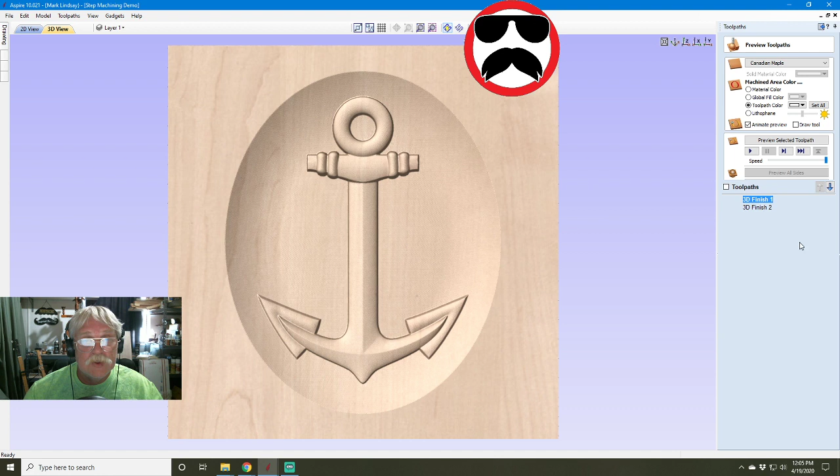Okay. Looking at the 3D view, I'm going to have to go ahead and close the preview, which I'm loath to do. But if we look in the 3D view, you'll see this representation of the material here. Let me go back over here to the modeling tab. You'll see this representation right here. It looks like the surface of the material. This is the modeling plane.

And the way it differs from the material surface is this is the plane that all of these models are built on. Whether you're in additive mode right here, your combined mode is additive. It's adding this entire model on top of this plane, and you're building up models from here. Remember that VCarve and Aspire both model starting from the bottom up. Well, they have to have something to sit on, and that's what this modeling plane is.

Now, one of the questions I got in the comments was, why didn't I put a zero plane here when a zero plane is needed to clean up the edges, especially on a dish? And the guy who asked the question was absolutely correct. I should have put a zero plane here, but I didn't want to add confusion by adding too many steps. So I just kept it basic, because what we're concerned with is the detail on this anchor. We weren't really concerned with what's going out here.

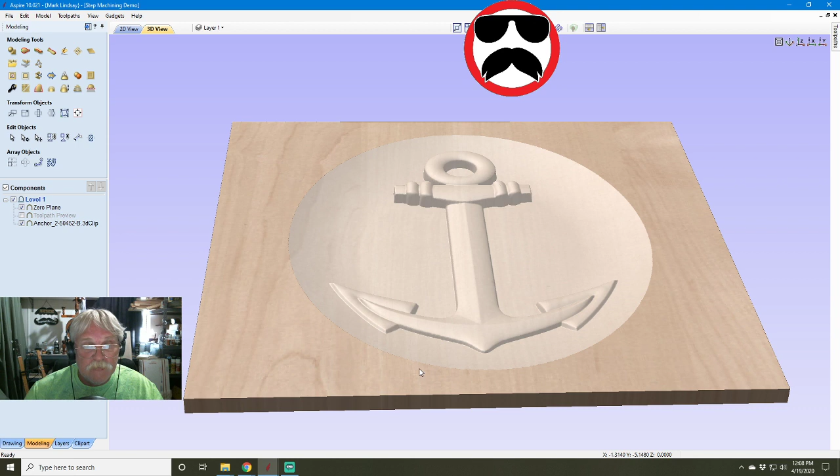Then when everything is built up, the zero plane adds the surface of the material and integrates it with the models that you have out here. I hope that answers your question. Let me know if that confuses you.

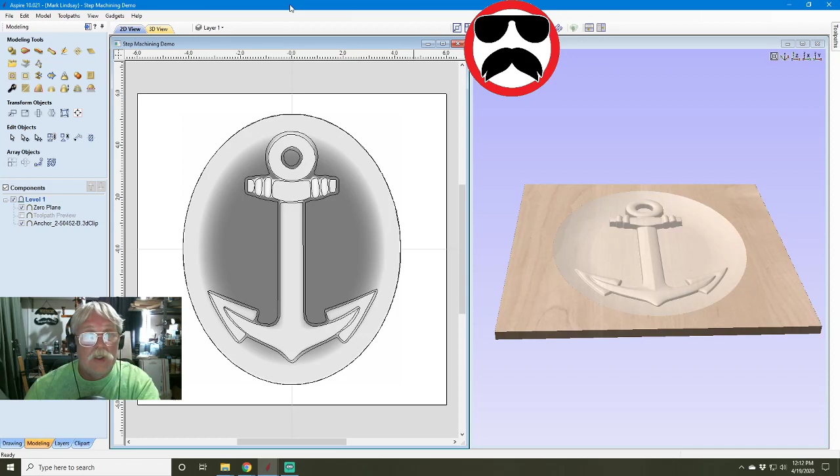Is there a way to carve the anchor and bowl a little shallower? Yes, there is, Dale. Let me go back into Aspire here. We'll go back into the 3D view, and back to a straight Z view. That has to do with the properties of the anchor. Now I've got the anchor selected here. We'll go up here into the properties, and we see the shape height. I referenced this briefly in the video, but we've got a shape height of 0.3525.

And if we turn this, we can see that means the lowest point it's cutting down in here is that thickness here. Now, if I bring it down, let's say to 1/4 of an inch, and let it update, if you look down at my readouts, you can see that the lowest point it's cutting is 1/4 of an inch deep. So that's all to do with the shape height here.

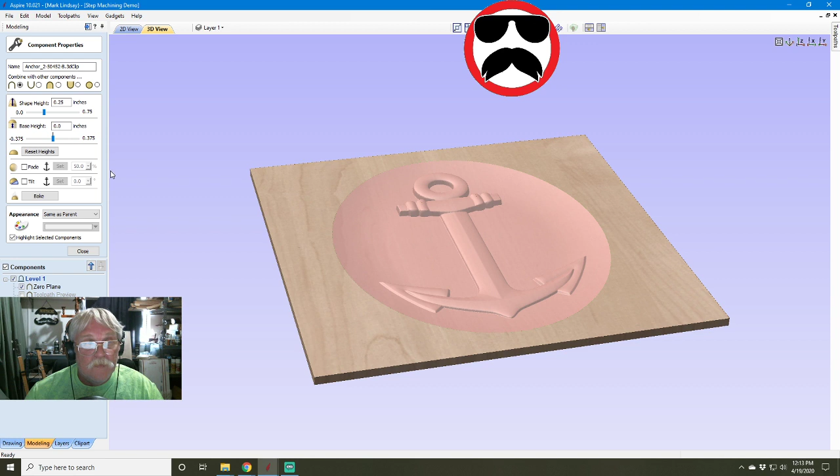And it also updated the zero plane, because it now believes, this being the surface of my material, the distance from my zero plane down to my modeling plane is only 1/4 of an inch, because that's as deep as it's going to cut. But that's controlled right here in the properties with the shape height. Now I'm going to Control Z to undo that, and we're back to my regular height, and we'll go back to a straight Z view. I hope that answered that question. So let's go back and look for more questions.

Michael Roy said, okay, wait a minute. Let me go back all the way and get them in order here. Kurt Briegel, thanks. So how does one decide how far down in the material the modeling plane is? Okay, there are a couple of ways of doing that. Let me go back to Aspire. And I should just actually look at this stuff before I switch back and forth.

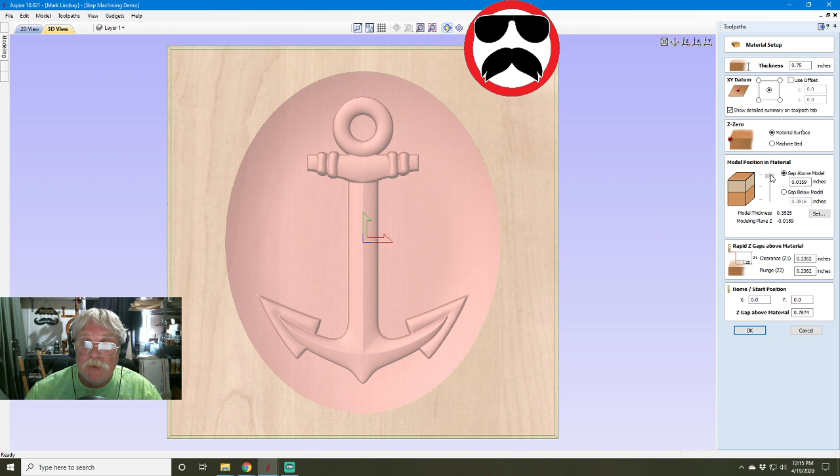If you're using clip art or you have drawn a model and you are not importing something, you can adjust where the modeling plane is by coming over here into Material. Let me cancel that. Come over here into Material Setup, click on Set, and adjusting the model position in the material. That's not exactly the same thing, but it's close to adjusting where this modeling plane is in relation to your block of material here.

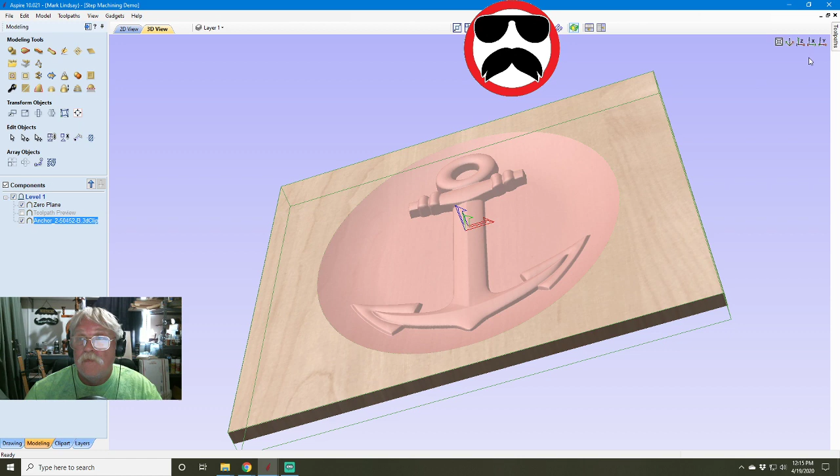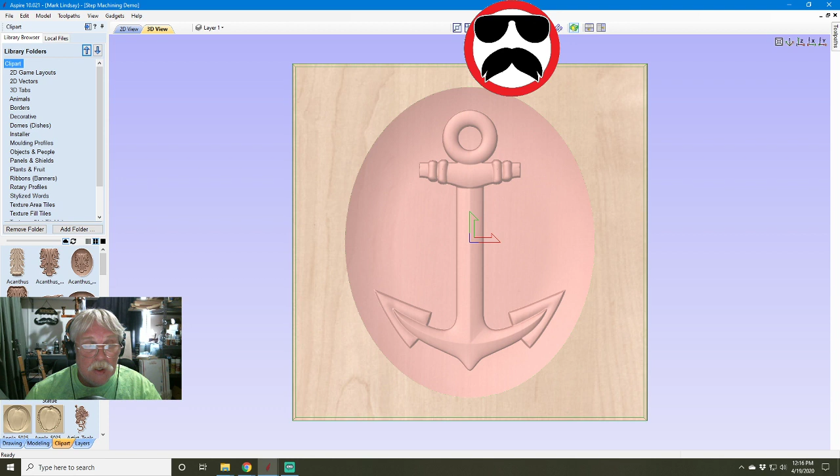Now, if you're importing a model, whoops, wrong one. If you're importing a model, that comes within that import screen. Let's see, file. Nah, I don't want to import a model on top of this. When you import, you will place where the modeling plane is in relation to the model, because it doesn't know. You have to establish that when you're importing. But if you're using the clip art down here in the clip art library, it assumes your modeling plane is going to be down here at the base of your material, and you're either adding or subtracting this model from that modeling plane.

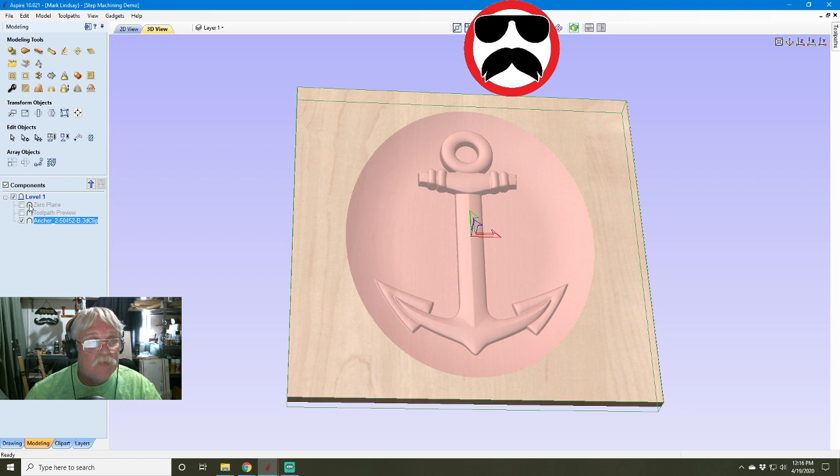So, I saw that someone else asked, how do you add a zero plane? Let me turn it off. In fact, I'll just go ahead and delete it. Let me turn it back on. I'll just go ahead and delete the zero plane. The zero plane is over here in the modeling tab, and it's in the top row under modeling tools right here all the way to the left.

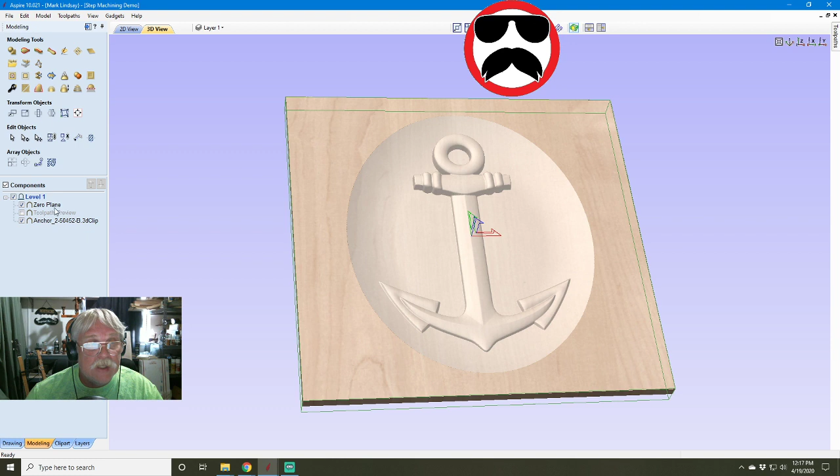They don't actually name it zero plane. If you hover your cursor over it, it says add a plane component with zero height covering the model. So you just click that, it adds a zero plane to the component tree, and there it is. And that is in VCarve or Aspire. Both of them. So, somehow I got my origin showing here. That's okay. No problem. All right, hope that answered those two questions.

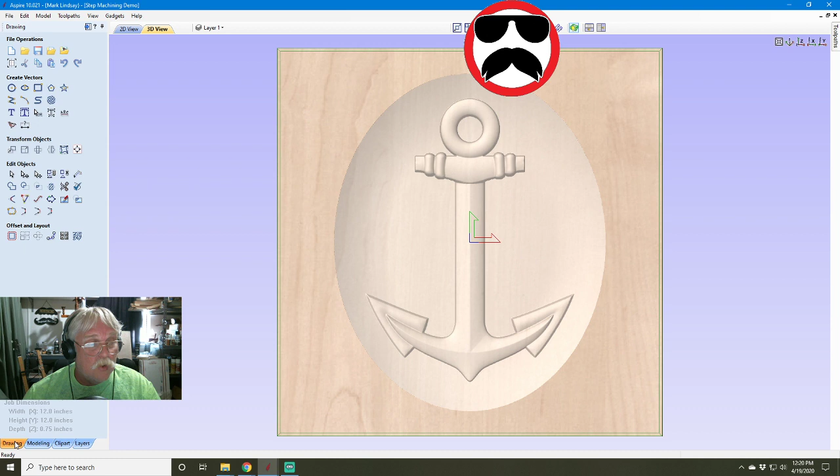Go figure. Let's see. Hey, Mark, how do we get a PDF drawing in VCarve from Albert Drew? Very simple. Let me go back over to a screen share again here and get rid of the pop-out chat. Go back over here into my drawing tab, go into my 2D view, and you go File, Import, Vectors. And one of the choices is PDF in here.

Now, a word of warning. Not all PDFs are created equal. Not all PDFs have vectors on them. You'll notice if I come up here to File, Import, Bitmap, well, it used to be, not anymore, PDF was listed too, because some PDF files are actually JPEG snapshots that are saved in PDF format. So if you import a PDF file, you may get some vectors, but you also may have to do a bitmap trace on them. Just be aware of that.

So, let's see. Roger the Tinker, I run Windows 7 with only 2 gigs of RAM. Yeah, VCarve and Aspire do not take up a lot of resources. So, let's see. Another way to help explain zero plane would be modeling plane, turn on the draw material block. Yeah, but I think they got the gist of this.

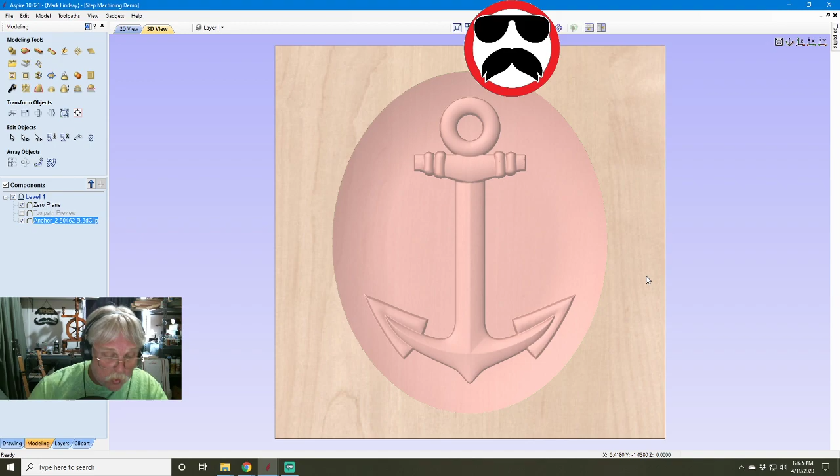So let's see. Let's go back out here and check for questions. Alrighty. Are we about out of questions for this? Jeff Stryker says there's an online cheat called 78 Shortcuts for Aspire. It's a PDF file, easy to find. Google. Thank you for that tip, Jeff.

Also, let me do this one more time here. If you come in to your help menu, second one in is keyboard shortcuts. You click on that, it opens up a browser tab, and there are all your keyboard shortcuts. And there are a ton of them, as you can see. And this is a PDF file that is stored on your computer. You can see right here. It's stored on your computer as part of the help file. And there are all kinds of keyboard shortcuts. Way more than I could ever document.

So I am not even sharing that. Am I? Yes, I am. Okay. Alrighty. Hopefully that answered that.